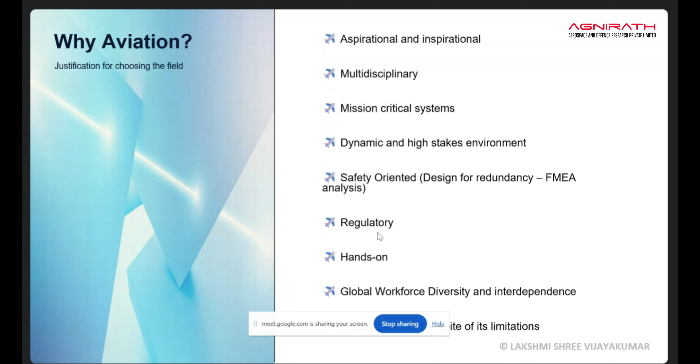Jumping to key skills and education, the main thing is you need to have a system perspective. You need to understand how systems interact with each other and get a holistic perspective, because nothing is independent here. You cannot think in silos, you have to think system-wise. If you're an engineer, you have to think how do I talk to air traffic control, how do I talk to operations, how do I talk to maintenance, because everything is interdependent on each other.

You also have diverse career paths, like I said, operations, engineering, maintenance, and also meteorologists and a lot of specialists. This is a specialized field, you need a specialized skill set. By this I mean you might need certifications, like for safety, or anything you want to specialize in, like aerodynamics—you have to have that skill set and know that set of tools. This is apart from the degree you've pursued.

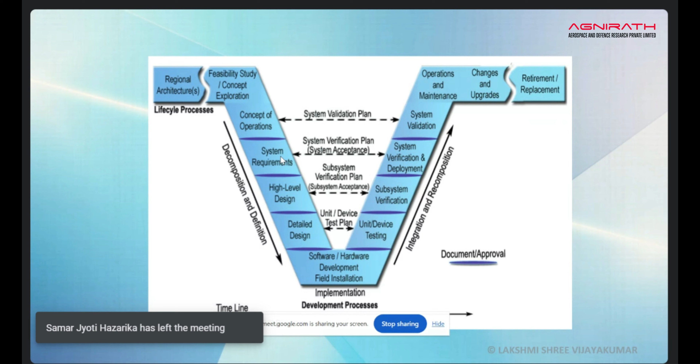So by this you have this V model. This is one of the most famous models of system engineering, where you define the concept or the use case, like carrying passengers from A to B. Then you have system requirements, which are then divided into high level design, detailed design, or preliminary and critical design, followed by their implementation in software and hardware.

And then for each of these phases, you have testing. So for concept of operation, you have system validation. For system requirements, you have system verification. So each of them has a separate plan for testing, so that the acceptance or the system validity is guaranteed, followed by operation and maintenance, and also changes and upgrades. They're also managed within the system life cycle itself until the system is retired or replaced.

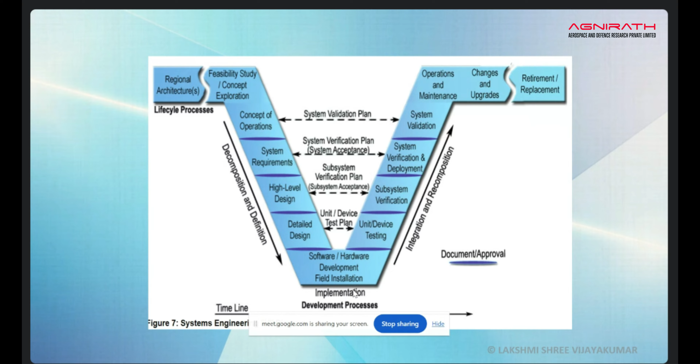Okay, so coming to simulation, what I can say is it's a safe environment. This is one of the unique features of aviation, or aerospace, I would like to highlight. Not in every field do you have this simulation, because it's a very important and mandatory step as well. So what is simulation?

So I would just take you through the advantages of simulation. The first thing is it offers a safe environment for training and skill development. All the pilots or air traffic controllers can train as much as they want and on various scenarios. So it's safe and nothing is impacted in real time or on the ground.

And then you have easy access. You can just go, and whenever it's free, interact with the simulator based on the setup. You can also create a lot of weather and terrain scenarios which are very critical to aviation. You can test some new system features or prototypes, like software or hardware changes, because it serves as a quick test bed - it's like a fail fast, fail safe method.

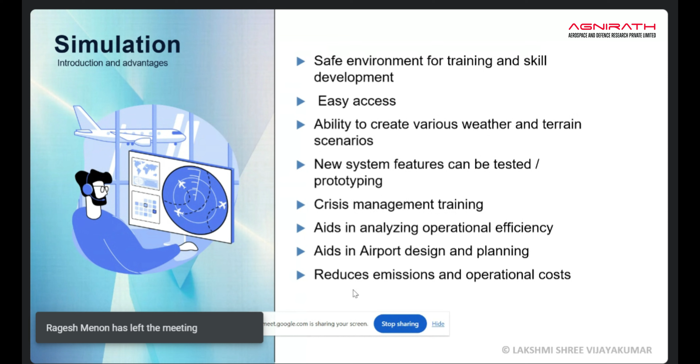And crisis management training, which is very important in this field, is also available through simulation. So pilots, air traffic controllers, or even ground staff can all practice how to handle situations such as emergencies like low visibility, fire, or any emergency scenarios.

And it also aids in analyzing operational efficiency. This point is mostly relevant to airports, because in the airport you have the airport simulator where live traffic is fed into the simulator, and you can analyze how many aircraft per hour your runway is able to handle, and see where changes can be done, like if you want to add a terminal or a taxiway, how to manage, or if you need to add a runway or other controllers. So it's a very good test bed to analyze this, and it also aids in airport design and planning.

And one of the main advantages of simulation is it reduces emissions because it's not a live environment, and also reduces operational costs. Imagine if you have to test something in the real environment - you lose a lot of money, and the emissions are high.

Coming to testing - this is just a brief introduction. So you have the process of verification, which means: did you build the product right? You have some system requirements, then you have your test plan where you verify according to the system requirements. That's the key line - did you build the product right? It's basically depending on the system team who builds the product.

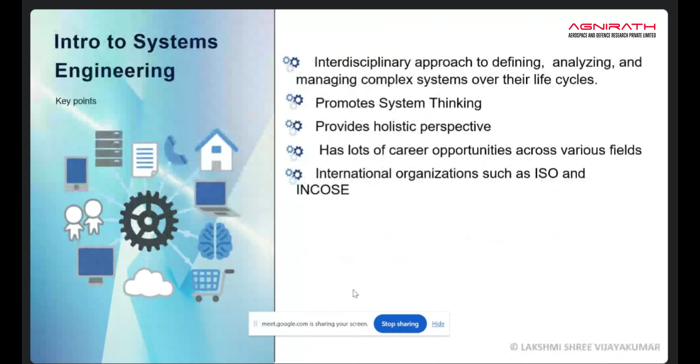Okay, coming to what is aerospace. Now we'll be jumping into those three parts I mentioned before, that is aerospace, airport, and airline. We'll go through them one by one.

So what is aerospace? It's a branch of engineering concerned with design, development, production, testing, and maintenance of aircraft and spacecraft. Let's talk about aircraft. You have three main fields: aerodynamics, structures, and systems. My focus will be on systems, while aerodynamics and structures are also really good career profiles you can look at separately.

Overview of aerospace systems. I've tried to list the main aircraft systems. One is the flight control system, mainly used for controlling the flight, then the flight management system, where you have the flight plan, flight path, and basically the guidance, and communication and navigation system to communicate with control towers or area control centers. Navigation is to follow the route map. Engine control system for making sure the engines are operating well. Landing gear system, of course, to land the aircraft. Environmental control systems to ensure the pressure, temperature, everything in the aircraft is ideal.

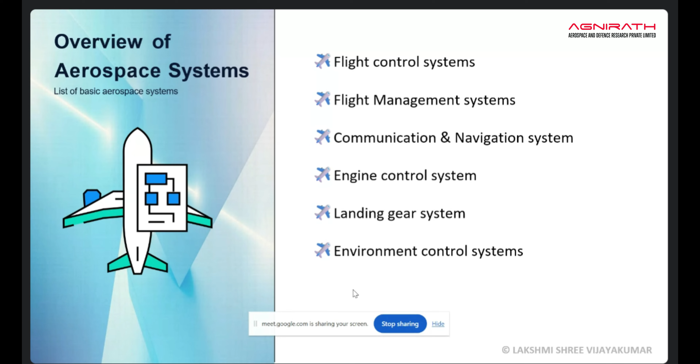So these are just a very small overview of systems. There are many more systems, like the traffic collision avoidance system. There are a lot of them. These are just the basic ones, just to give you an idea.

And these are the career paths. You have system engineer, of course, and software developer, system development engineer, testing engineer, avionics engineer, which focuses mainly on the avionics or the cockpit part. Then you have data analysis engineers, which analyze the data from the flight and see if there can be any improvement, or if there is any predictive maintenance or corrective maintenance required.

And of course you have researcher. So these are research options - there are a wide array of research options in the aerospace career field, so you can choose any of them. In this webinar I'll be focusing only on the engineering professions. There are also non-engineering or non-STEM professions such as law, marketing, finance, and aviation, which will be addressed separately.

So the aerospace sector overview. You have the aircraft manufacturer as the main, like Airbus, Boeing. Then you have system integrators - you might have heard of Honeywell, Collins, or Northrop Grumman, a lot of system integrators, and you also have regulatory bodies.

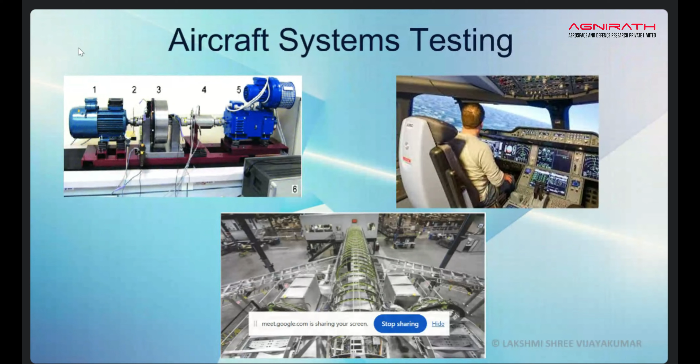I just want to give you the importance of criticality of the software and hardware which goes into aerospace. There are five levels: A, B, C, D, E. The first one is catastrophic. If you have a catastrophic error, it means one of the main systems, like the flight control system, engine control system, or terrain avoidance, is in error, and it would result in multiple fatalities or the loss of the aircraft itself. Basically, it's like a scenario for an aircraft crash.

Then you have B, which is hazardous - significant impact on safety, but still not necessarily catastrophic. So if you lose any of the primary systems, secondary systems are still there. Then you have major, where you have major disruptions to the aircraft, but not necessarily compromising safety - maybe your secondary systems are gone, but you still have primary, so that's why it's called major. Then you have minor disruptions or inconveniences, like if an in-flight entertainment system or passenger Wi-Fi is not working, and some have no effect, like the cabin lighting system or internal intercom not working, which would be classified as no effect. Each piece of hardware and software will be designed according to these levels of criticality, also called design assurance levels.

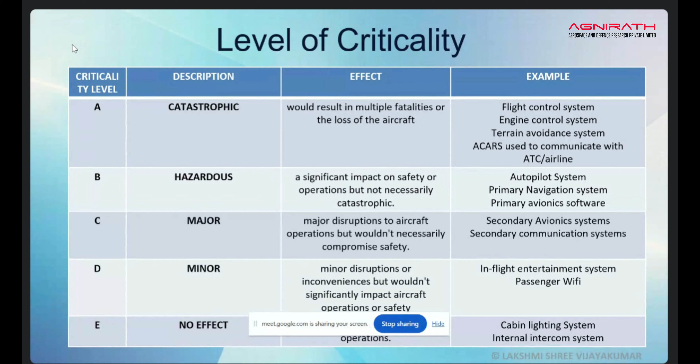Just to give you an idea of the famous disasters which have happened due to ignorance, confusion, or lack of communication - that's why safety is very important. The first one would be the Tenerife airport disaster, which occurred in 1977, due to miscommunication and misunderstanding between the air traffic controller and the flight crew caused by dense fog. That's why communication, even if verbal or in English, has to be clear and crisp so there is no confusion between the air traffic controller and the pilot, or even between vehicles and the air traffic controller within the airport itself.

Followed by the Ariane 5 launch failure - this was because of a copy-paste error which occurred, and the software used a 64-bit floating point number which exceeded the system limitations. As a result, the guidance system failed, and the rocket launch itself failed.

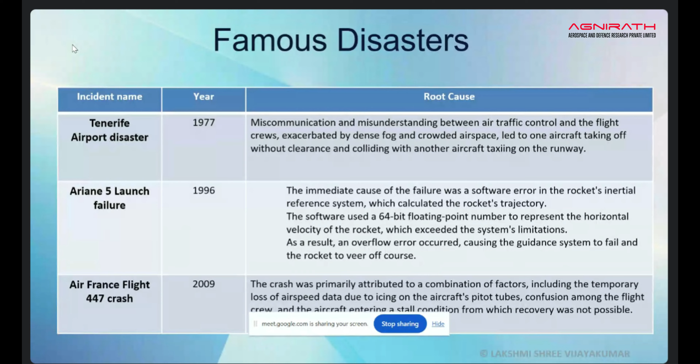Okay, coming to airport sector overview. So you have a lot of stakeholders in airport as well. You have the airport authority, you have ATC, operations, safety. Then you have a lot of airlines which also interact with the airport authority, like they take permission for fueling, for parking the aircraft, and for operating it basically. And you have a lot of regulatory authorities as well - regional, national, international authorities. Then you also have a lot of suppliers. So it's a very diverse field where you have a lot of stakeholders just interacting and building one system.

Giving an overview of the airport systems. So you have Airfield Surface Movement Guidance Control System, its acronym is ASMGCS, which has various levels. It has a lot of components like surveillance, routing, lighting, and conflict management. This is one of the latest systems used across some key airports in the world, which can tackle low visibility and harsh weather conditions, while also improving operational capacity and efficiency. It's a very interesting field which I have worked on myself.

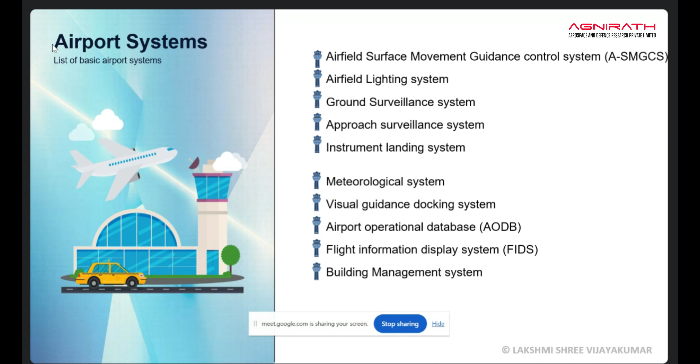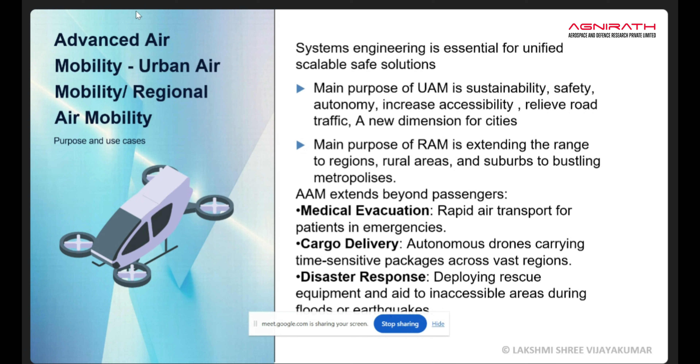I'd also like to highlight UAVs, the drones, which you might already know. There's also a ground control system, and a communication link between the drone and the ground control system. Use cases are civilian, commercial, research, and military and defense - used for a wide range of purposes.

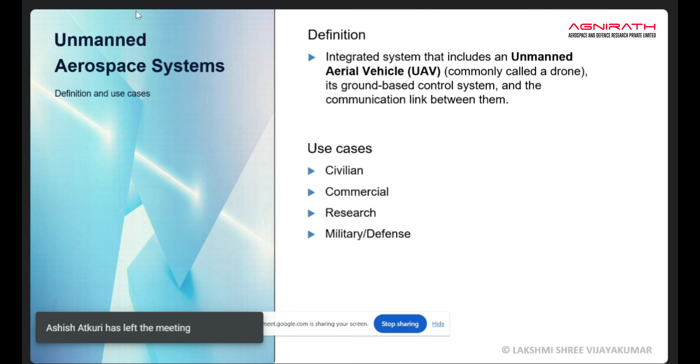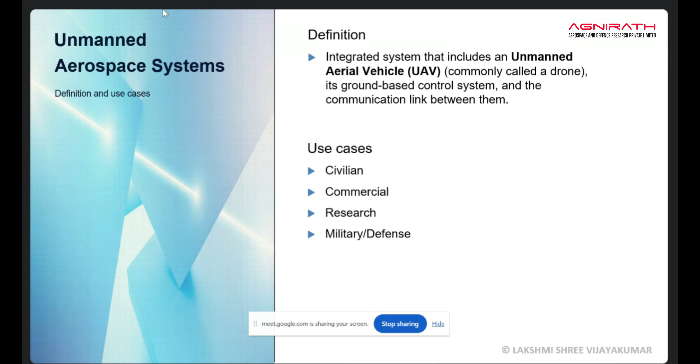In civilian use, it's used for disaster relief and medical emergencies. For commercial, you already have delivery of packages by Amazon and similar. For research, you have environmental monitoring - monitoring the air for environmental purposes, to track global climate change parameters, for example. Military and defense has a lot of purposes for UAVs too. Also in civilian use, there's a lot of drones used for agriculture, to improve efficiency or quality of crops, and also to plant crops. There are hundreds of use cases which can't be specified in one slide alone, but this gives you an idea.

Coming to career paths similar to aerospace systems engineering - you have the same principles of systems engineering being used in space, automotive, military defense, transportation (even rail is a very good example), smart cities, and energy. Based on the career paths I showed you for aviation, you might get an idea for the career paths even in this. It's most likely going to be similar.